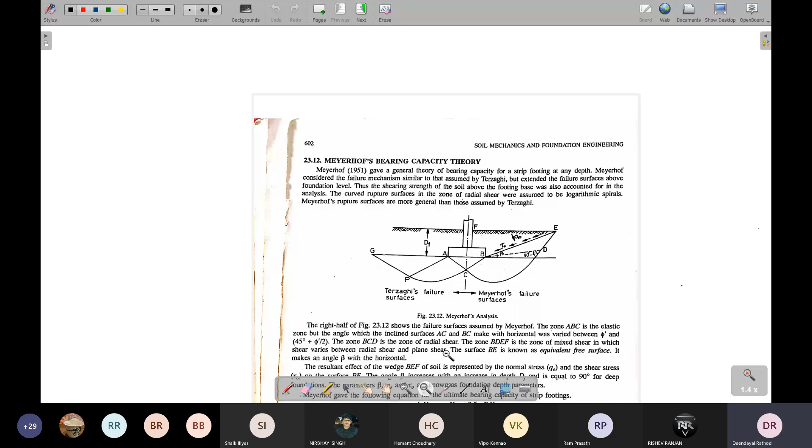If you remember the rest of the thing you can read it. This is what Meyerhof says. I will check it, and he has given equations also.

What we'll do is we'll stop with this board, quit it, and go to our general PDF that we have. So this one is the general one.

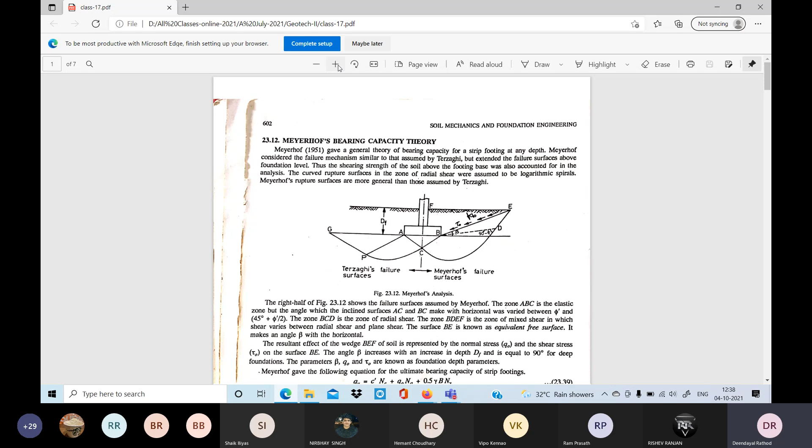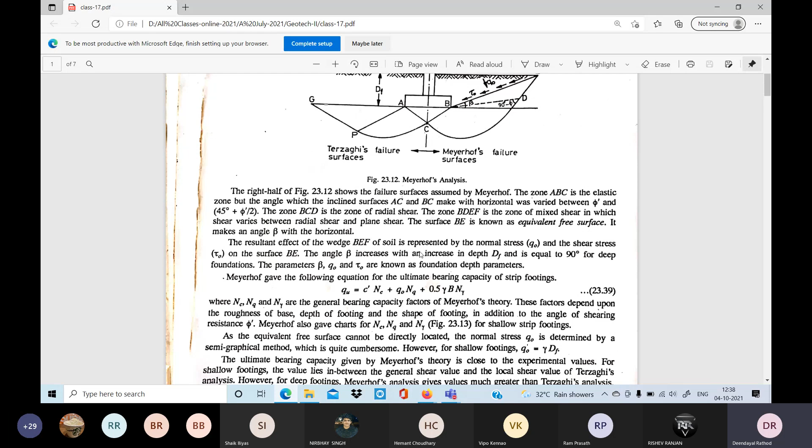So there was a problem, and this is what it says. If you look at here, he has given the equation for ultimate bearing capacity, which is exactly the same as Terzaghi's: C dash NC NQ.

But the only difference here is he has given his own NC, NQ, and N gamma values. These general bearing capacity factors of Meyerhof's theory depend upon the roughness of the base.

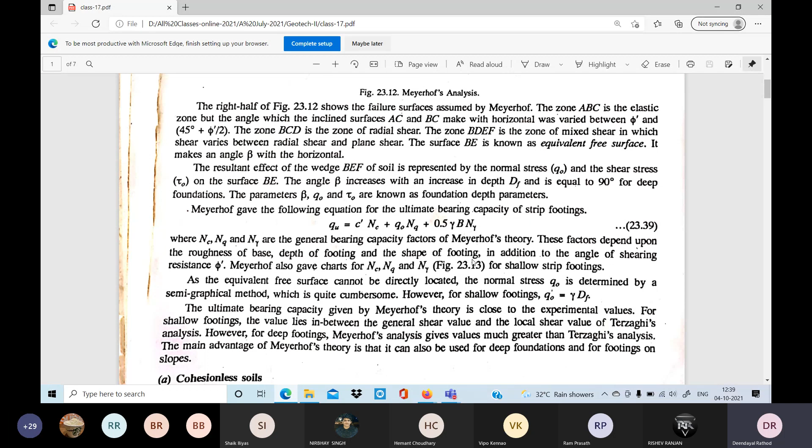Then depth of the footing and shape of the footing - that's the only difference here. Terzaghi said it only depends on the cohesionless parameter, that is the phi value, the internal angle of friction. But Meyerhof says it depends on the roughness of the base, depth of the footing, and shape of the footing. That's the only difference, and he has assumed the failure surface in this fashion.

So these NC, NQ, gamma values are given in this figure - figure 23.13 - some charts are given for that.

Ultimate bearing capacity given by Meyerhof's theory is close to the experimental values for shallow footings. The values lie between the general shear failure value and the local shear failure value of Terzaghi's. So whatever values he gives come in between. However, for deep footings, Meyerhof's analysis gives values better and greater than Terzaghi's values.

The main advantage of Meyerhof's theory is that it can also be used for deep foundations, and for footings on a slope also. This particular theory can be used.

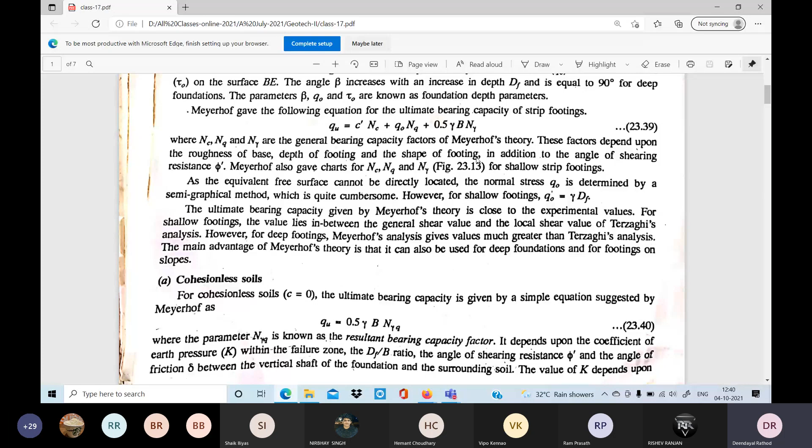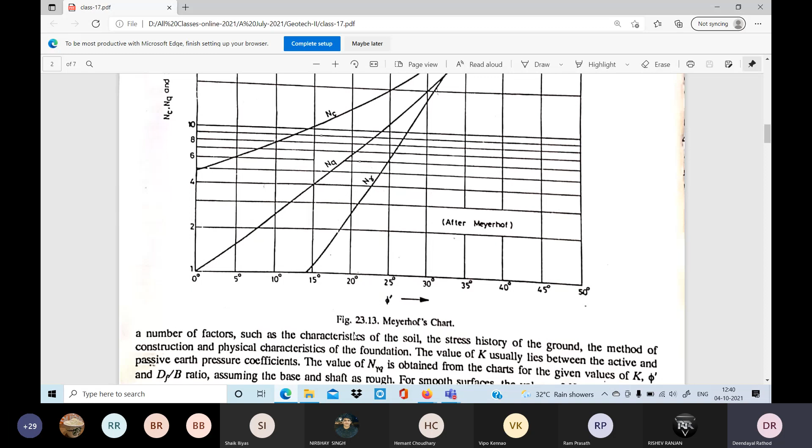Understood? There's a difference. What happens for cohesionless soil? The other term becomes zero, and the equation comes in this fashion. This is what he was telling about NC, NQ, and gamma values.

Meyerhof, with phi values, will give values for NC, NQ, gamma. You can get it, and which not only depends on the cohesionless parameter and angle of internal friction, but also roughness of the footing at the bottom and the shape of the footing and so on. This is how it comes for cohesive soil.

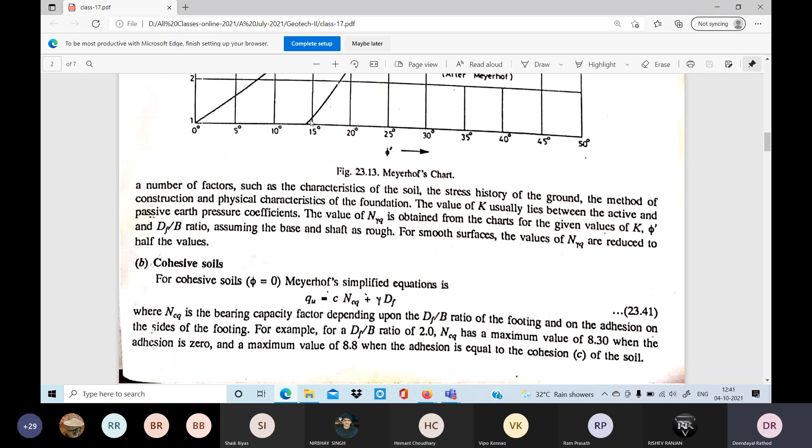When NC, NQ, gamma are applied, this is what it shows. So next is Hansen's bearing capacity theory. Terzaghi is very important, but these guys also we cannot neglect. They worked after Terzaghi and have given their own different equations.

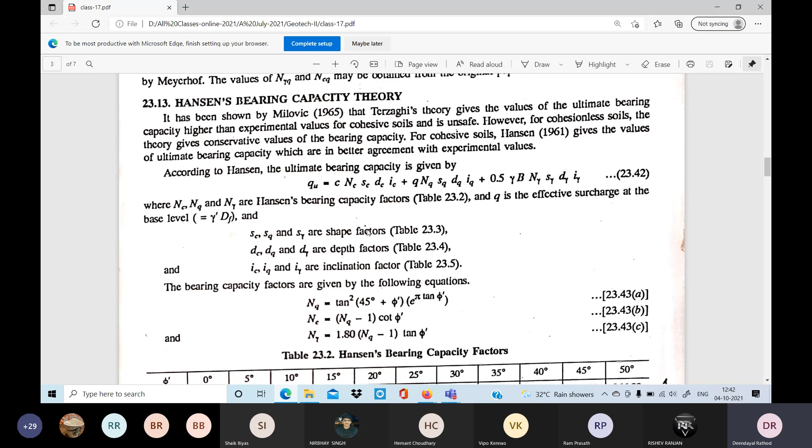So Hansen's bearing capacity - what is the difference here? Same NC, NQ, same Q surcharge term and the NQ, same 0.5 gamma B into N gamma. What are the extra terms coming here? Can you just see? What are the extra terms coming here?

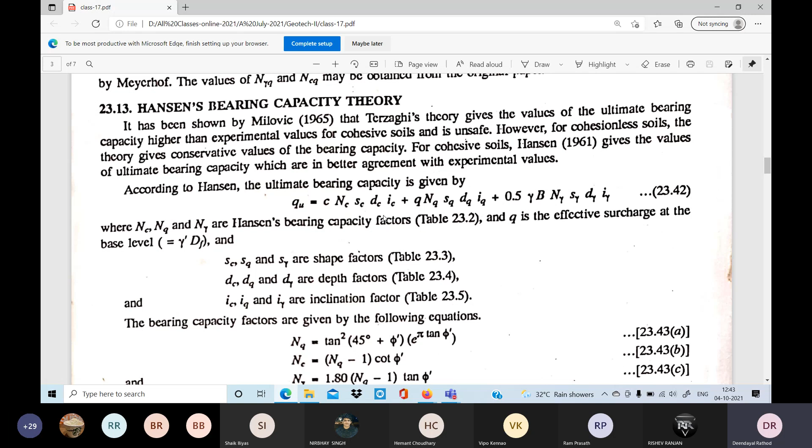This shape factor SC, depth factor DC, and inclination factor IC - the rest is the same. Where NC, NQ, and gamma are Hansen's bearing capacity factors, he has given his own table, and Q is the effective surcharge, gamma DF, we know that. The only extra factors are the depth factor, shape factor, and inclination factor of the ground he has considered. NC and gamma are given, and similarly the table for NC and gamma is given with respect to phi, and shape factors also given here.

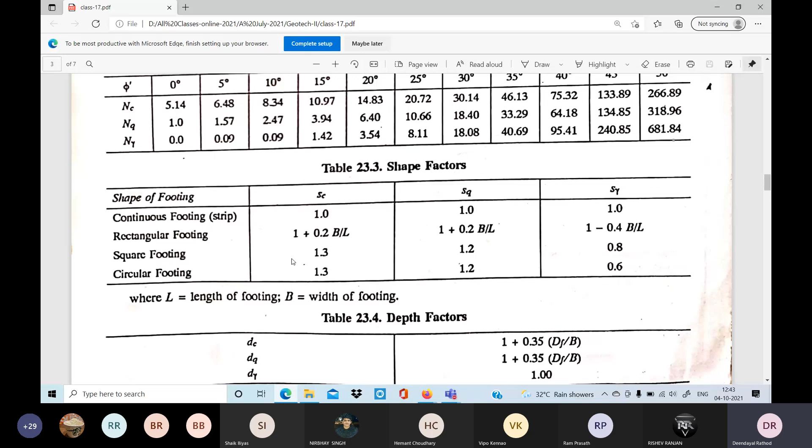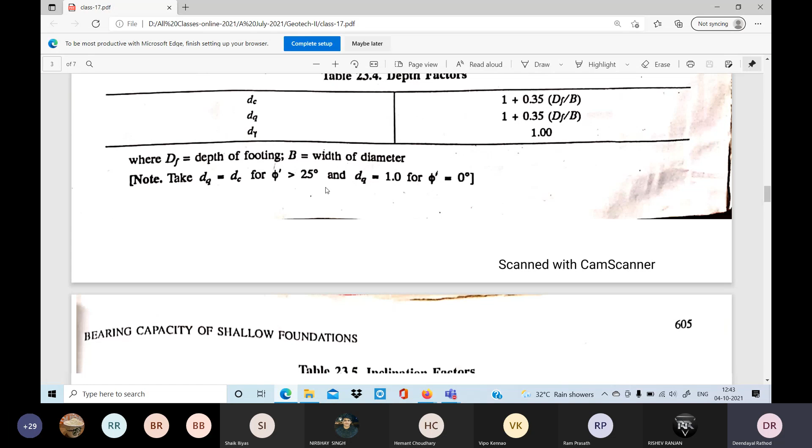For continuous footing, SC is 1, and S gamma, SQ are also 1. For rectangular footing, he has given this as 1 plus 0.2 B by L. For square footing 1.3, 1.2, 0.8 for circular footing. So different shapes he has given, depth factor also he has given, where D is the depth of the foundation and width or diameter and so on. And he has given the inclination factor if the footing rests on an incline.

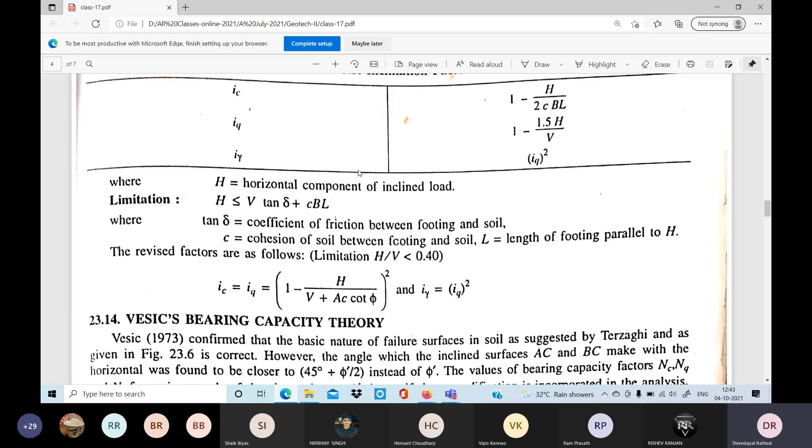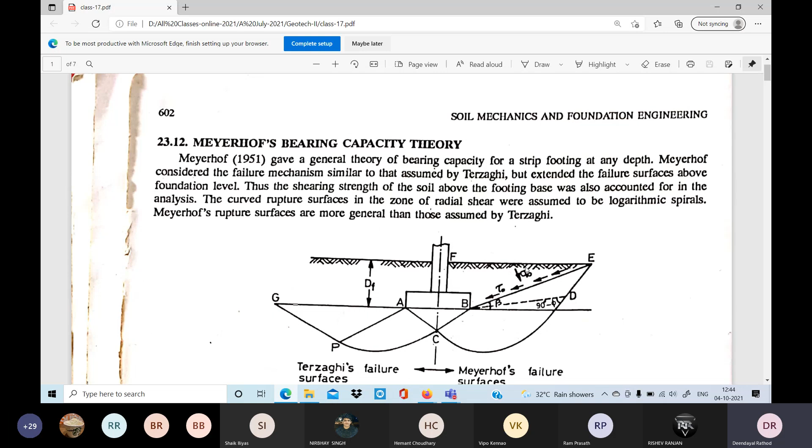Hansen has also worked after Terzaghi and Meyerhof, who say that the failure surface would be such that there would be some shear, and here we can find out the effective surcharge. Likewise, Hansen has also given his own theory.

Vesic also did a lot of research, in 1973, and he has given his own NC, NQ, N gamma factors. So people are playing with these factors only, but the base is Terzaghi's theory only.

Once you are okay with Terzaghi's theory, the rest is just an addition to that. Vesic confirmed that the basic nature of the failure surface in the soil suggested by Terzaghi, as given in that previous figure, is correct.

However, the angle which the inclined surfaces AC and BC makes with the horizontal was found to be closer to 45 plus phi/2 instead of phi. The values of bearing capacity factors NC, NQ, and N gamma for a given angle of shearing resistance change accordingly.

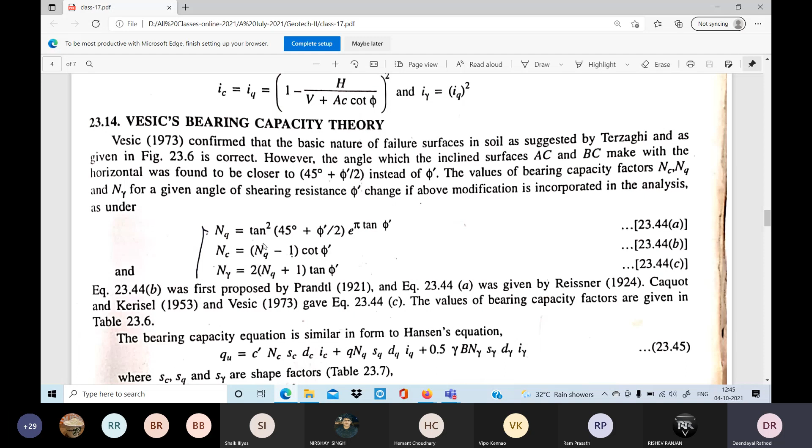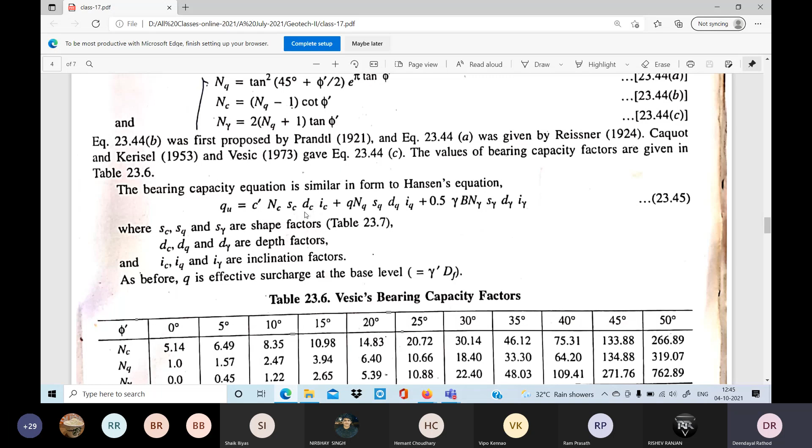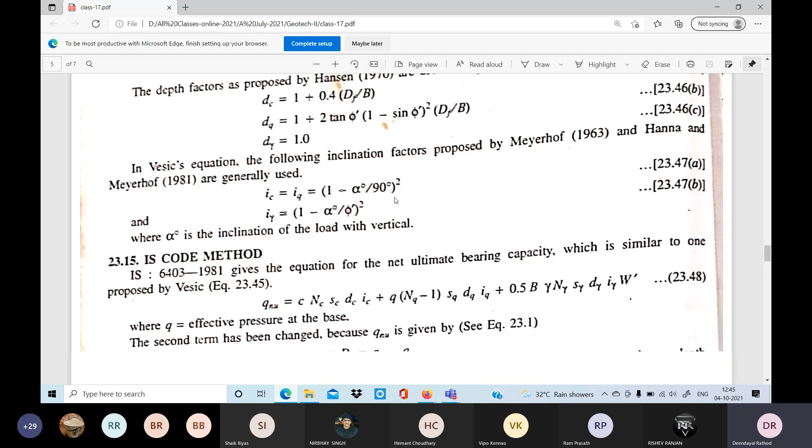So Vesic has given NC, NQ, and N gamma, first proposed by Prandtl and others, and the bearing capacity equation is similar to Hansen's. He has given the same equation like Hansen, but with his own NC, NQ, N gamma bearing capacity factors. Interesting, right? This guy does research, and after that others give their own factors.

Next, coming to the IS code - generally we copy from someone's work and make it our code, whether it's a building code or IS code. So the IS code has generally taken from the basic equation with little modification. This is very important for us.

The Indian Standard Code says the ultimate bearing capacity equation is similar to the one proposed previously, where C, NC, NQ, N gamma, and 0.5 are there. Other terms SC, DC, IC are there, and NQ is given as NQ-1 here; the only difference is these factors.

What is W dash? It's the water table we have considered here - Q, the effective pressure at the base. The second term has been changed because net ultimate bearing capacity is given by Q ultimate minus gamma Df. So the factor W dash takes into account the effect of the water table.

Here, below the ground surface, we are considering this term, which comes below the base of the footing. If the water table is at a depth of Df plus B, measured from the ground, then it becomes 1 - that we have already seen.

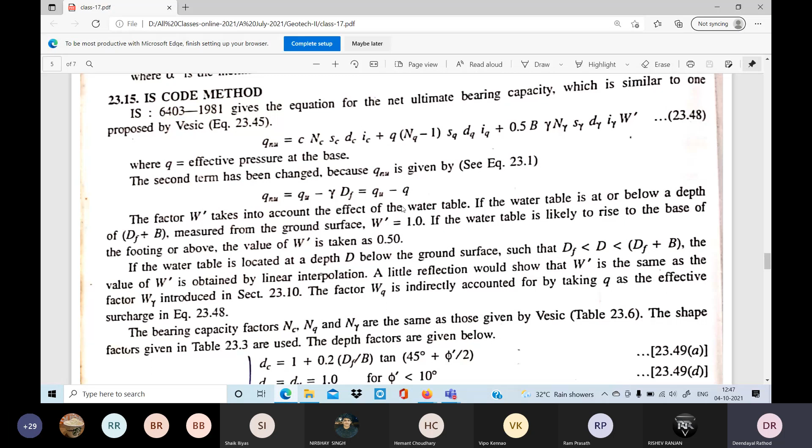If the water table is just below the width of the footing B, if it's at B times below that, the water table correction factor is 1 only, negligible - we've already seen this. If the water table is likely to rise, the reduction in bearing capacity can go up to 50%. If the water table is located at depth D below, we have already covered this.

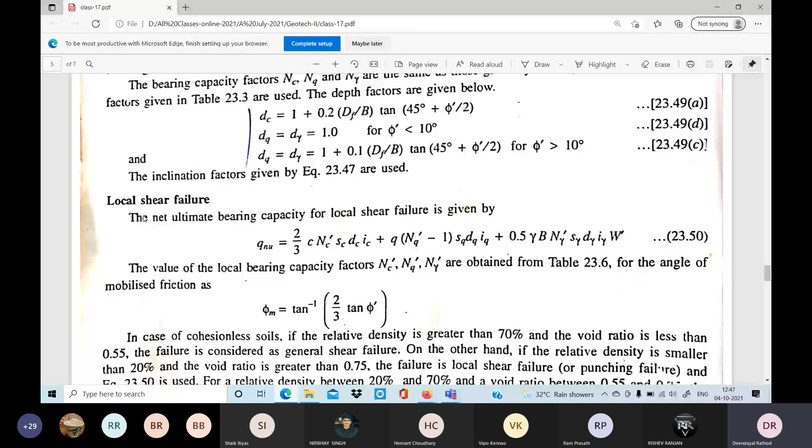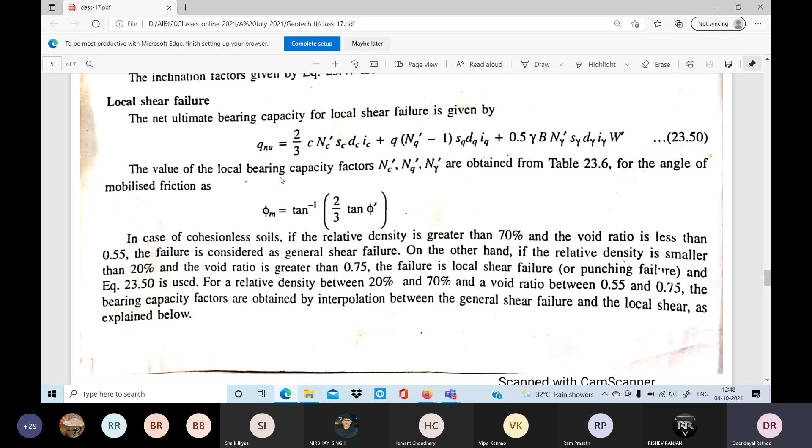Then the code has given the depth factor and so on, and we have considered local shear failure also. We already know local shear failure: C becomes 2/3 C, and phi becomes mobilized as 2/3 of tan phi dash. We have considered this now - the previous equation is general shear failure, and this one is local shear failure.

Let's read this paragraph again. In the case of cohesionless soil, if the relative density is greater than 70% and the void ratio is less than 0.55, the failure is considered general shear failure.

We have already seen why we consider general shear failure and local shear failure, based on density, void ratio, and settlement - many things we have seen previously if you go through. So the failure is considered as general shear failure in that case.

On the other hand, if the relative density is smaller than 20% and void ratio is greater than 0.75, the failure is considered local shear failure or punching shear failure, and the equation with the 2/3 factor can be used. We generally don't worry about punching shear, as we mostly focus on local shear failure only.

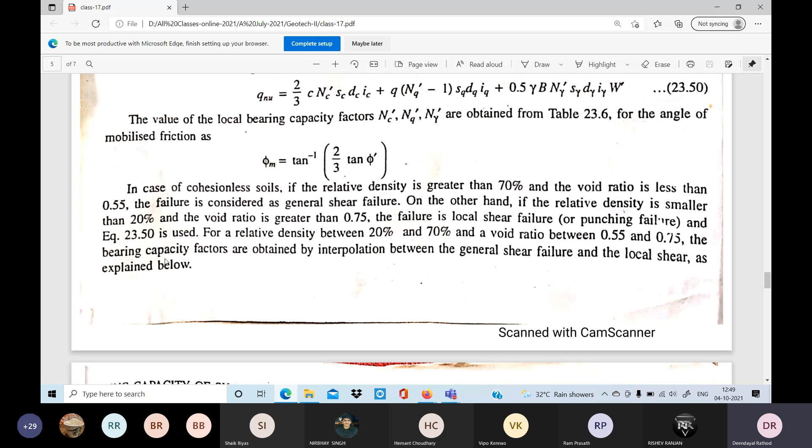For a relative density between 20 and 70, if it falls in between, the bearing capacity factors are obtained by interpolation between the general shear failure and local shear failure values. Some interpolation will give that bearing capacity factor. This is what the IS code has given, along with an example for the relative density case.

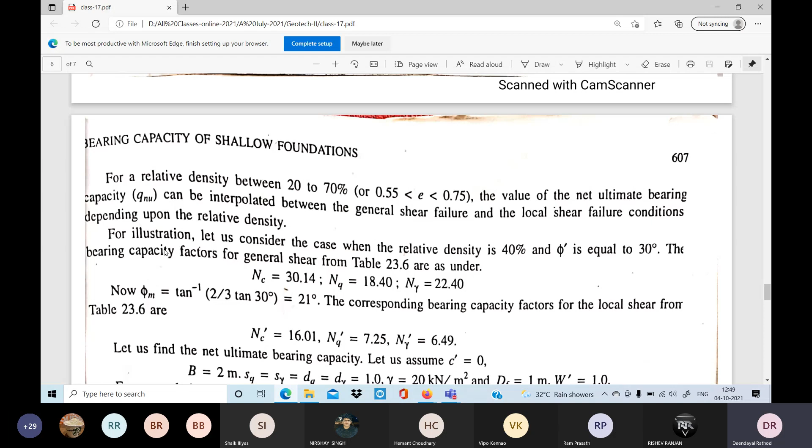So illustration has been given. You just go through this one to see how we calculate NC, NQ, N gamma for the mobilized 2/3 case. You will get it for 40% density and phi equal to 30, and so on. It's very simple. For general shear failure, we'll get the values from the table. So you can try this one.

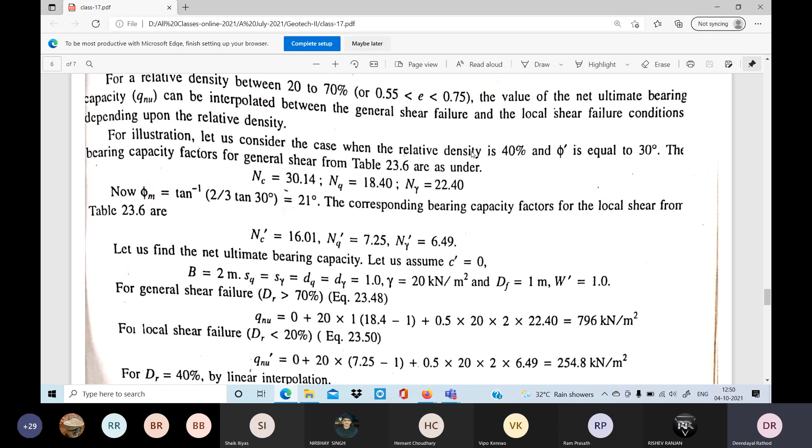Suppose let us consider the case where the relative density is 40, and phi is equal to 30. The bearing capacity factor for general shear failure, go to the table and get NC, NQ and N gamma. Then for mobilized, you can calculate 2/3 of that one. C also you can calculate, and NC, NQ, N gamma - this is for local shear failure and this is for general shear failure.

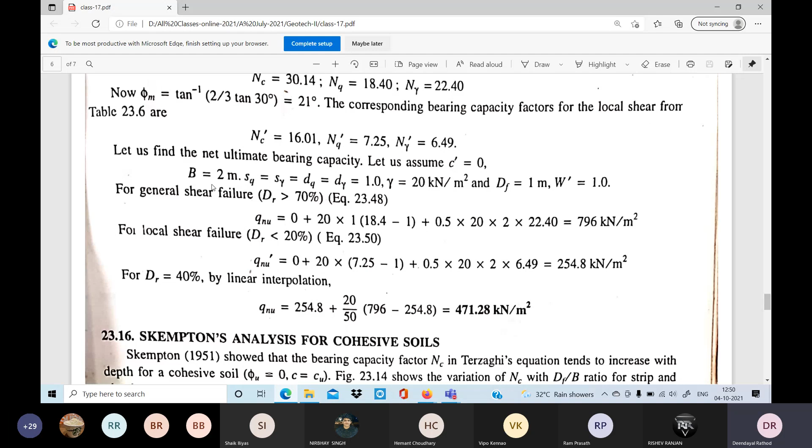Let us find the net ultimate bearing capacity for C dash, cohesionless soil. If the B is given as 2 meters, find the shape factor, depth factor and inclination factor. And finally, you can find the net ultimate bearing capacity also. Some example is given.

Understand? So again, let me check this Skempton's analysis. The IS code, before Skempton, has given equations for cohesive soil also. So this is the equation for net ultimate bearing capacity for a cohesive soil - shape factor, depth factor, inclination factor. The other term becomes 0.

Here if NQ becomes 1, then what will happen? This term, N gamma, becomes 0. We are talking about net ultimate, gamma df. So it becomes only this term. Hope you are following. We are talking about net ultimate bearing capacity - if it is ultimate plus gamma df, it will come as NQ gamma df. Here NQ is 1, so net ultimate minus gamma df, you deduct, it will come to net ultimate.

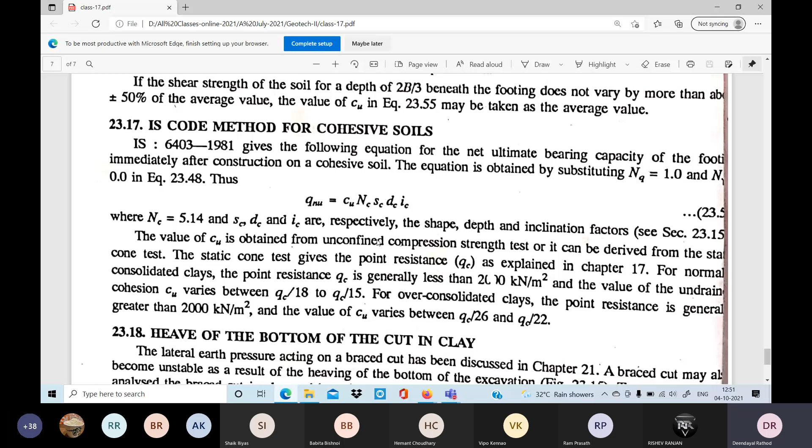Understand? So this Skempton's theory is also not that important for us because we will study it in master's level for different things he has given. I don't think it is included in your syllabus, but just giving a picture - if you want to do masters in geotechnical engineering, you will study Meyerhof's, Hansen's, Skempton's theories. These fellows have worked a lot. But at undergraduate level, Terzaghi's equations and some settlement equations from the IS code are enough, more than enough for you.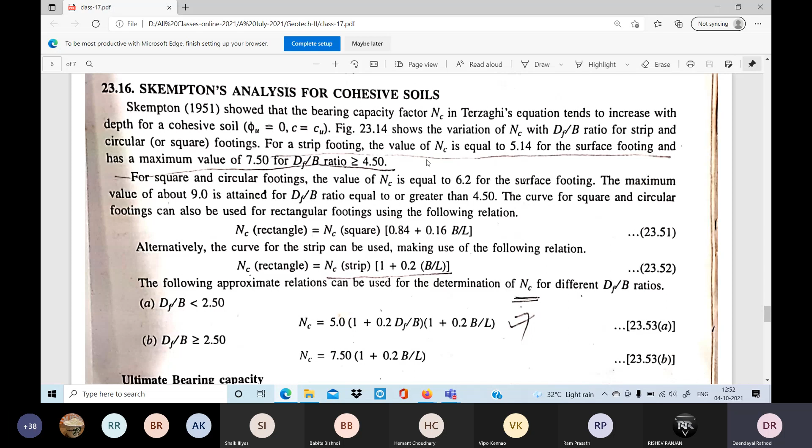So anyway, we'll go through it. Let us see what it is. Skempton showed the bearing capacity factor NC in the Terzaghi equation tends to increase with depth. The figure he has given is for NC versus D by B ratio. We have already seen this D by B ratio for square and circular footing. For a square and circular footing, the value NC is given as 6.2 for a surface footing, and so on.

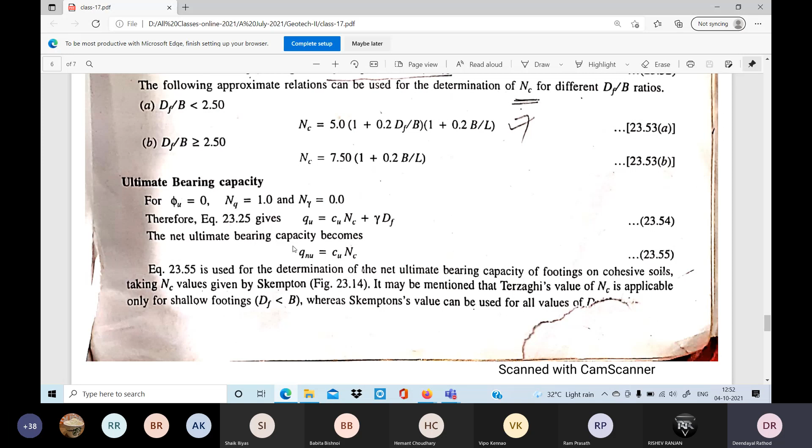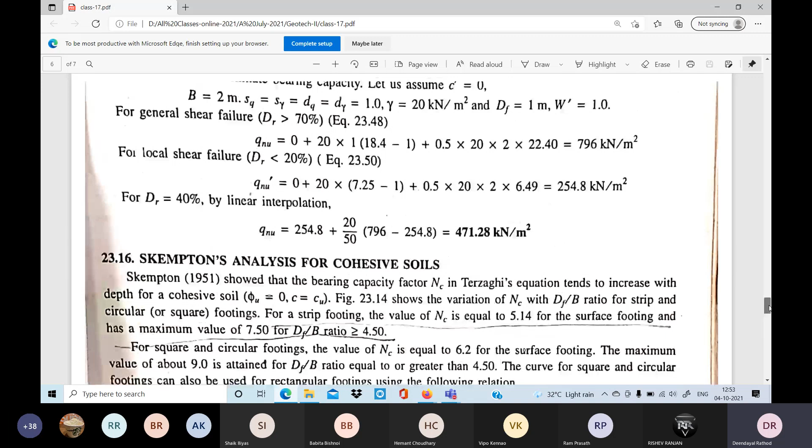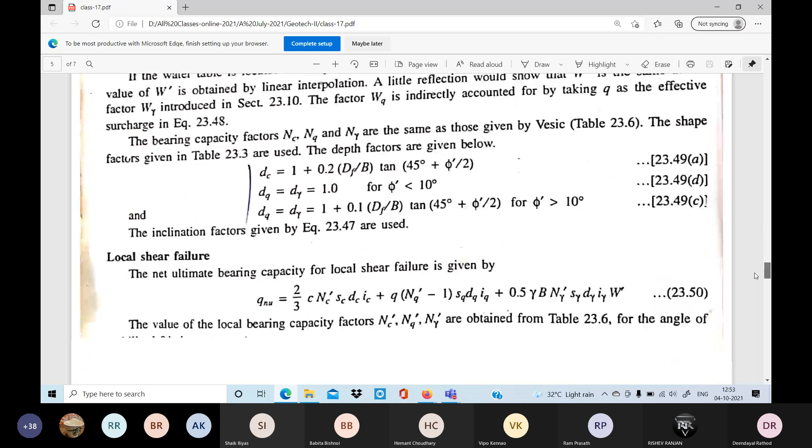So it is not there in this PDF. I think it's in the book if you check it. So next is what is heave at the bottom of the cut. So with that we'll stop today.

We have discussed some theories which are a little more advanced than Terzaghi's theories. What they have done is consider depth factor, shape factor, and inclination factor so that those theories would be valid not only for shallow foundations but also for deep foundations - though we'll do some testing for that. The failure pattern may not be exactly like deep foundation. Deep foundation means pile foundation. In a pile, you cannot imagine failure happening over the surface and all. Most of the theories are valid for shallow foundations only, but we can use them for deep foundations if the pile foundation width is very high, assuming there may be a similar failure pattern.

Hope you are following. Mostly this would be valid for strip footing, square, and rectangular footing by changing a little bit in the formulas, and these theories can be used. Only one thing you should remember for your competitive exams, GATE exam, and interviews is that Terzaghi's theories and other theories you should go through and read once. And you should know the difference, because sometimes they will ask in the exam and in the interview how the failure patterns are changing and what happens to NC, NQ, N gamma and all.

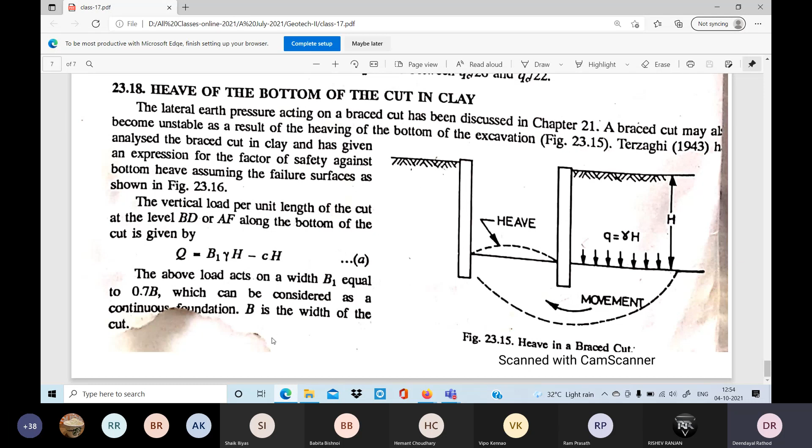So if you have clarity about that, then this bearing capacity factor chapter we can close. We can do some numericals also - so many problems are given. Maybe next class we'll take some problems, then you will understand this bearing capacity, how generally we find the ultimate bearing capacity. So with that, I'll stop today.